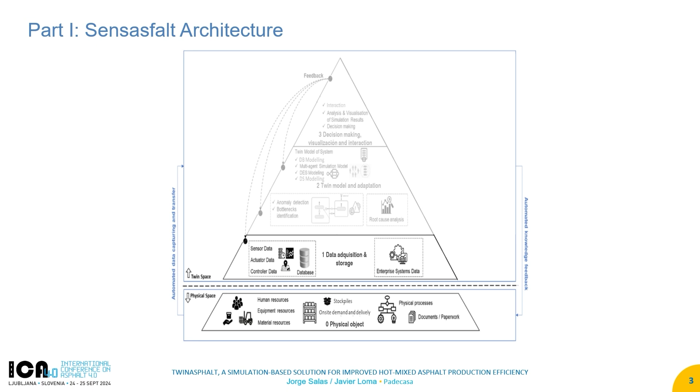This data, in our case, comes from two sources: one is the plant's PLC, and the other is from a net of sensors connected to a platform through an IO-Link network, which enables, in a very easy way, to gather the information of all the sensors, collect it, and send it to other places.

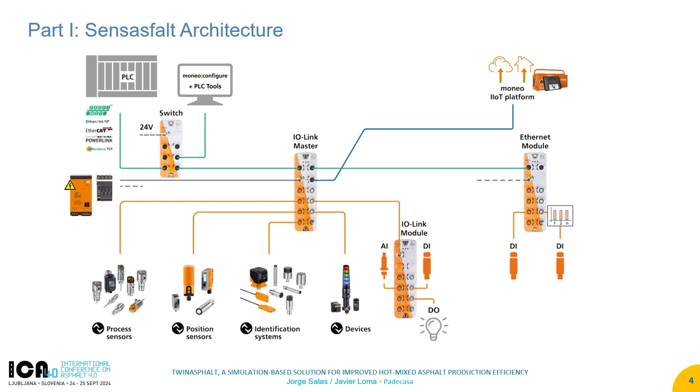This approach has an advantage, which is that you can deploy your sensoring system without affecting the functioning of the plant. So in case of retrofitting or upgrading plants, it's quite important because it reduces the impact on the production stage.

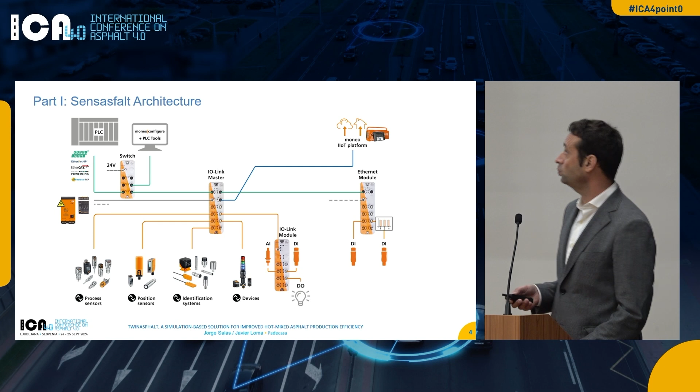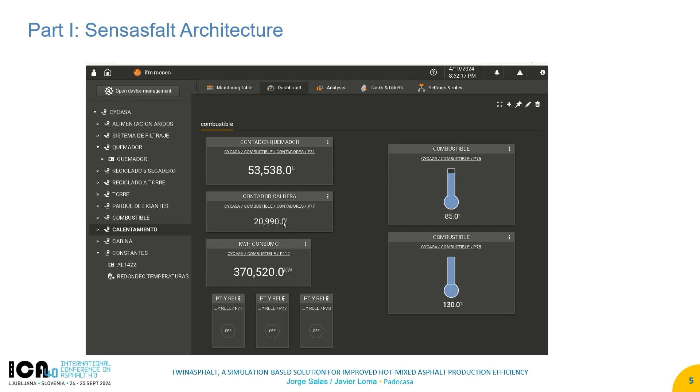This information goes to a Moneo platform. Moneo is a software for industrial monitoring, which allows visualizing the information and structuring it. For example, in our case, we structure it by parts of the plant, so the feeding system has its own sensors.

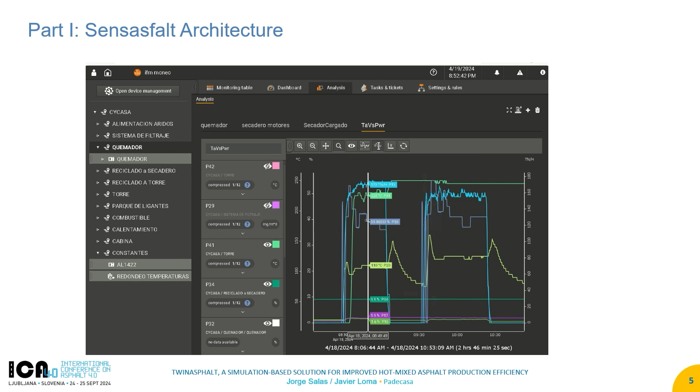The stocks can also be monitored, as well as what is happening in the dryer, the temperatures. For example, these are the temperatures of the dryer, which you can also use later on to fit models and so on—this is indeed what we are doing in our digital twin. It also provides information about the humidity of your materials and so on, in real time.

Once we have gathered all that information, we send it to an SQL database, which is a very common database language, through a data logger, KepServerEX. KepServerEX takes information from the Moneo system through an MQTT protocol, which is also quite standard, sends it to the database, and in the database we begin processing it.

We have developed our own application for associating the information from sensors to the events that happen in the plant, mainly to mixes. Each time a mix is created, the PLC gathers a lot of information, but the sensors do not, because they are not connected, so we must do that work ourselves through our platform and application. This way we also identify deviations from theoretical values.

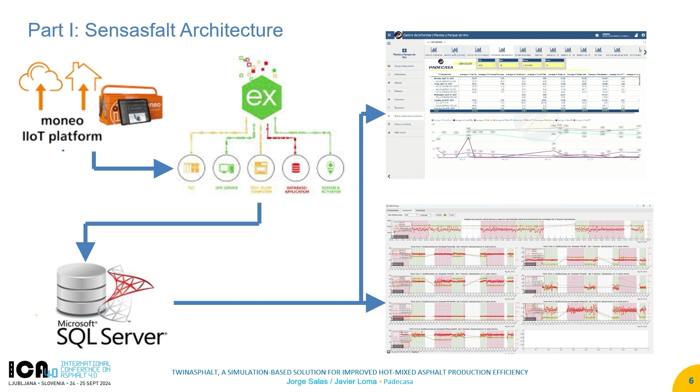Along with this identification, we have developed a Power BI-based platform which allows deploying the information to each department through a reporting system to perform quantitative analysis. With the first application, we can develop qualitative analysis to find out deviations; with the second, we can have an overall outlook of the performance of our production system.

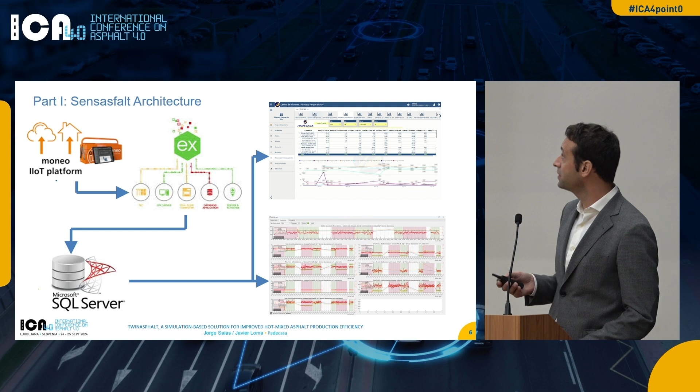This we have implemented in two plants. With it, we can also find out CO2 and CO2 equivalent emissions at mixes and delivery orders level, by type of recipe, and also by discriminating between types of material and sources of energy used to heat the components.

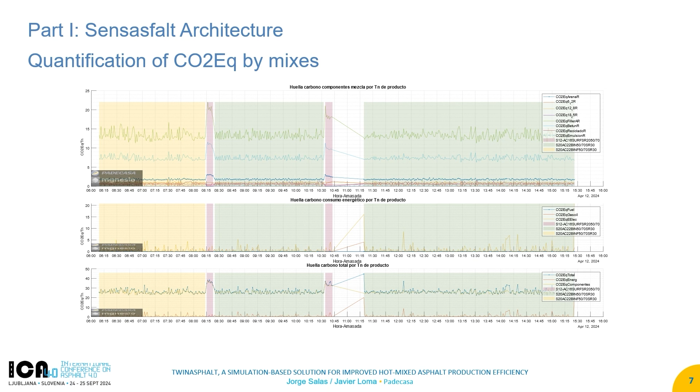So this enables us to develop our own environmental impact system. And this was all about the architecture of our monitoring system.

As to how we use it, the use case I'm going to talk about is using it for the identification of deviations from technical requirements. Specifically, we use it for identifying when a delivery order or a truck contains asphalt which could not meet the requirements of our clients in terms of the shape or the aggregates, the sizes of the aggregates within the mix. So at delivery order level, we can identify which delivery orders are out of or may be out of specifications.

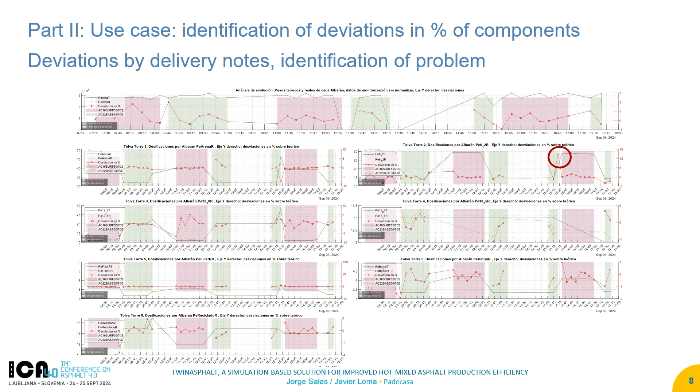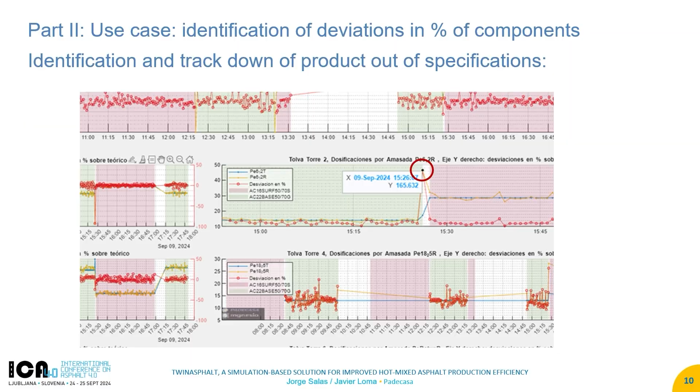We do that by plotting the real dose and the theoretical dose of each component, the sand, the other aggregates, the bitumen, and so on. And once we find one potential problem, we look at it more deeply at mix level, so we can identify exactly which mix could be problematic for us, and then inform the construction site and leave that part of the truck, or even the complete truck, without laying it, preventing having to spend much more money in the case of identifying further problems when the pavement is already done.

And this is the case I wanted to share with you. And if you have any question about it, I will be glad to try to address it during the rest of the workshop. Thank you very much.

Is there any question for Jorge? No. I think it's very interesting to see for quality control of what we are delivering, no?

That when you detect something, it's always better to say, please don't use this mix or this truck, or part of the truck, as you explained to me yesterday. And maybe it's just a few hundred euros, as you said, but if you put it on the road, it will cause a big problem maybe? Yeah, or it will have an economic cost and also a more important cost to your image. So the problem with those things is the cost with your client in terms of having to intervene in the road once it is operating and so on.

Yeah, so it's very interesting to see this continuous monitoring with the sensors in the asphalt plant is actually helping to provide a better quality. And also in these readings, in these graphs, you can see also the impact of different materials.

It's very interesting to see how the emissions change drastically depending on the mix. It's not the same for a coarse layer than a base layer. If you put cement, suddenly it goes up and down. So it's really nice to see how all these sensors are measuring what we expected.

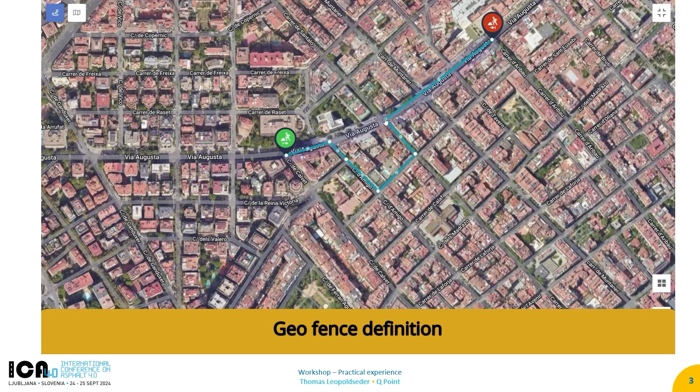It's also important that you can add graphical information like this. We enter a point of interest, which is the entry point of the construction, and this is the exit point. But I do not want to pave this road - I want to do it differently, so I remove these points and pave this section instead. This is important for people working on the construction, but also for truck drivers who will come later and deliver the asphalt.

So everything is now saved. The first process I want to support with the solution is not asphalt pavement, it's RAP management, because when we're milling the RAP material, it's also necessary to bring it to a RAP plant. We use the system to enter information that I will deliver RAP material to a recycling plant. I select a plant, the material I want to deliver, the time the trucks will arrive at the RAP plant, and the trucks which will be used. I add a comment, then send this to the RAP plant.

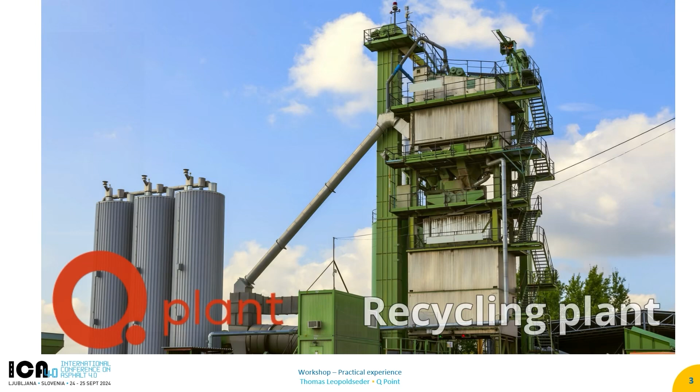You see a status here, and now we're changing to the recycling plant. We receive this information digitally. I can open it, and on the right side you see all the information entered by the client, very quickly. The RAP plant can check if they can accept this material and will approve it. The communication with the people on the construction site is done in this way. I accept it, and the site manager sees in the status that this delivery has been accepted. Okay, now we've delivered our RAP material.

Now we're doing asphalt management. We do more or less the same thing. We select an asphalt plant, select our mixing orders from a menu, so it's not possible to order the wrong material which isn't available at that plant. I select my delivery date, delivery time, and delivery rate, which means how fast I can bring this asphalt onto the road, more or less.

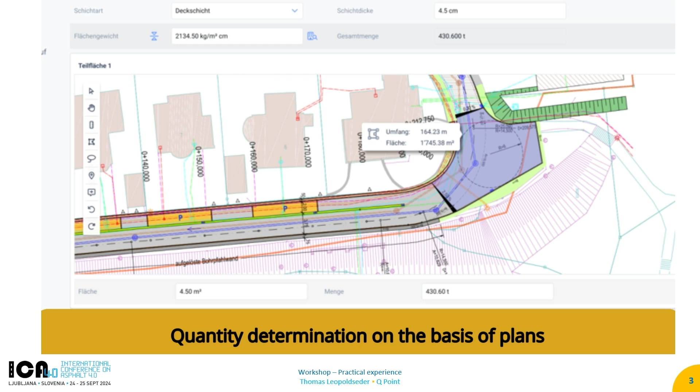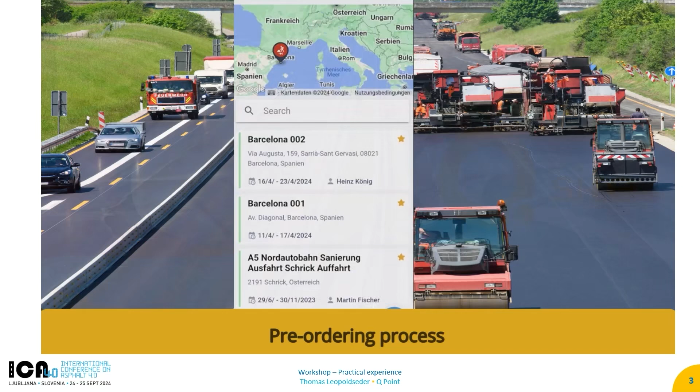I can decide which truck will be used for the transport if necessary, and I can also add a small comment - it's more or less a question to the asphalt plant: can you deliver this asphalt at that time in that quantity? So I send that to the asphalt plant. I create a second one just to show you we have two different types of requests. There's also a possibility to calculate quantities based on a map, for example on a plan. You can also predefine the route for the truck, which has to be used to come from the asphalt plant to the construction site.

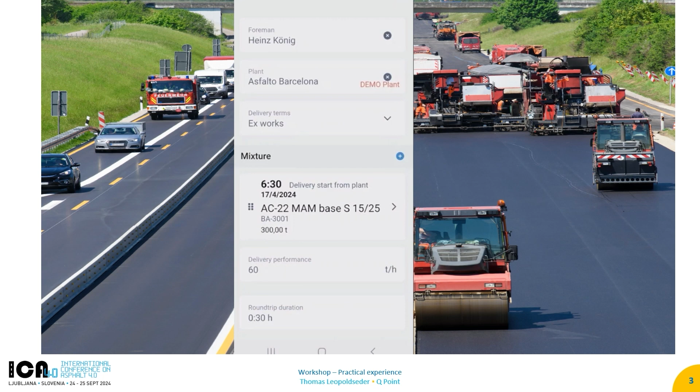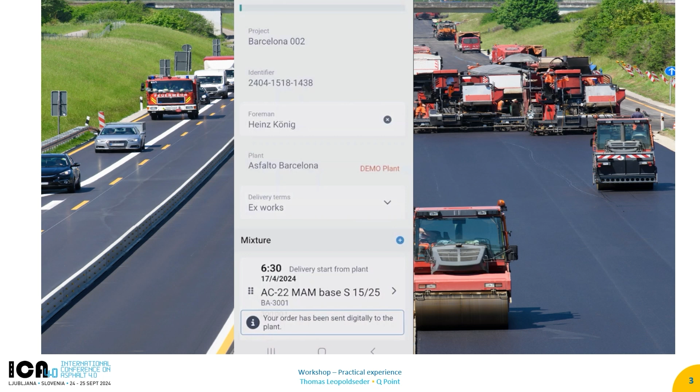Here is a screenshot of the app. So all this information entered in the web browser is also available on the app, and the foreman can send this prepared order to the asphalt plant. We can separate the processes between the construction manager preparing everything and the foreman changing something and sending it to the asphalt plant.

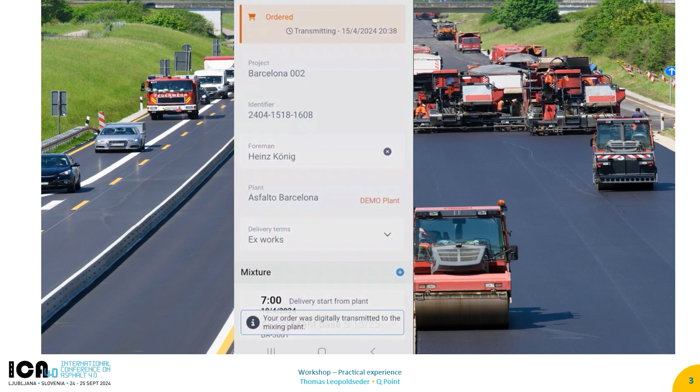What we're doing here now - we have two different states I want to explain. One is just a forecast of what will happen next week, and the other is 'I need this,' so we sign more or less a digital contract.

So we receive this on my asphalt plant. I get the same information here on the right side about delivery dates, about the construction, also the phone number, which is sometimes necessary, but it's not necessary to look somewhere else. I enter here, also from the plant side, some master data about the construction. This data can also be passed to the system via interface, and then I accept it just by pressing a button, and then everything is confirmed between the construction manager and the asphalt plant.

I can also add a comment, you have seen that. So the whole communication is organized with these digital tools.

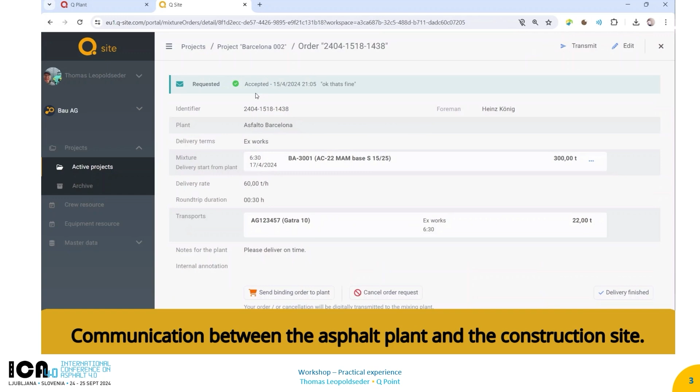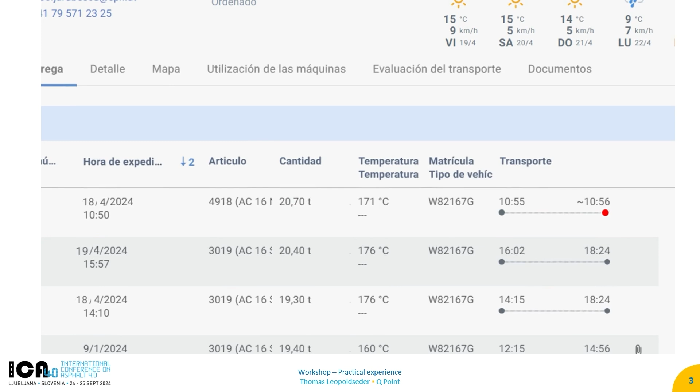On the other side, you see here it will arrive at 10:56, for example. And we are also sending that information to the asphalt plant to see when the truck will return.

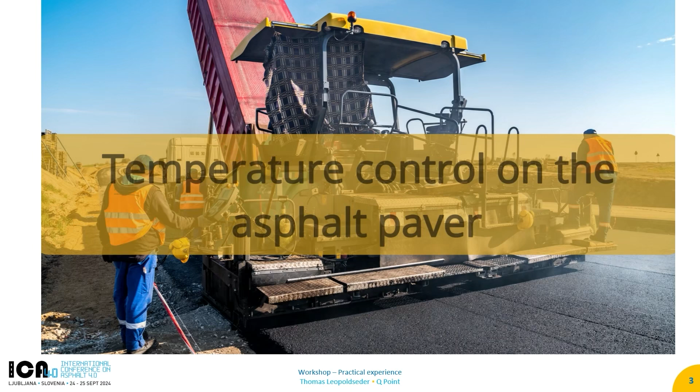During the whole workflow, we are collecting a lot of data. I've also reported something yesterday about energy consumption, about the orders, about all these things.

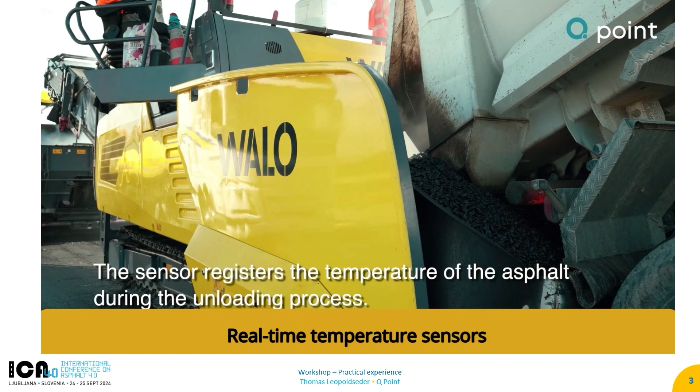So when we are now in the paving stage, we are supporting the machines by a retrofit system. We mount the system, the sensors, the GPS systems on the machines, any kind of machine, which guarantees that the accuracy is the same, that the sensor type is the same.

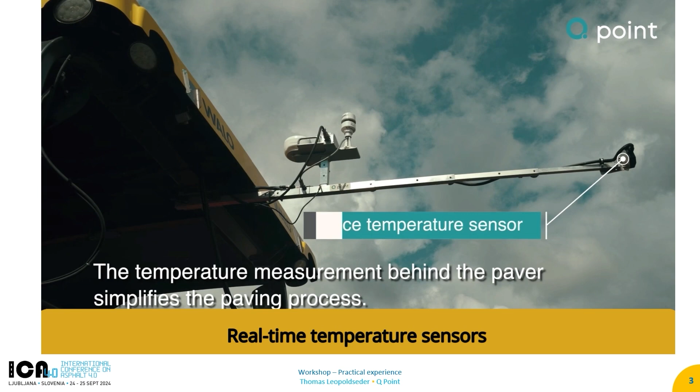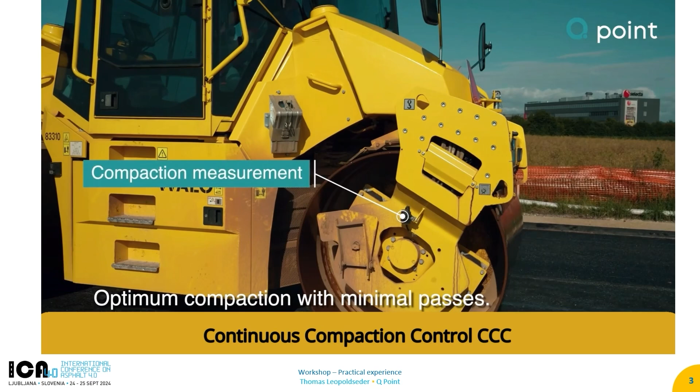We measure the surface temperature, the weather temperature and conditions, and during the compaction process we measure with sensors the temperature, also the passes, and also the stiffness if it's necessary and possible, depending on the type.

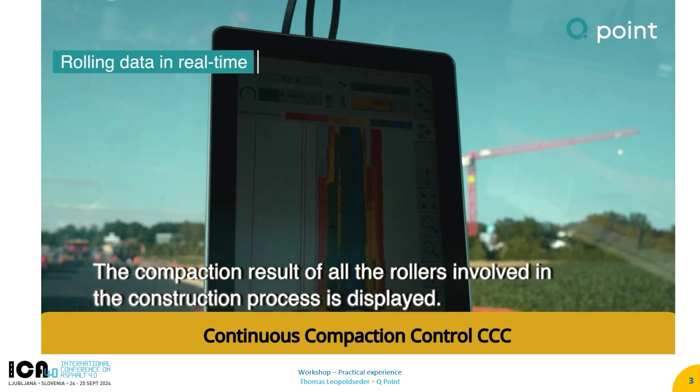We are visualizing that for the drivers, so they see what they are doing based on a target value which has to be gained.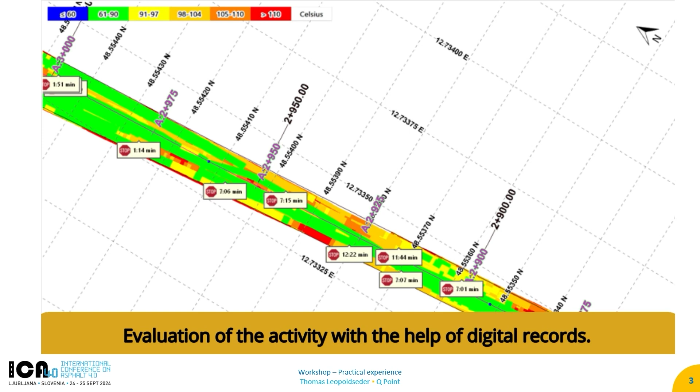The whole system is also online, so a quality manager can sit in the office and see what is happening on the construction site.

My colleague in Spain has a presentation at the moment, and I'm connected to this presentation and see exactly which demo example he is showing to our possible clients in Spain.

So the point is, you can manage the production, you can manage your asphalt plant, you can manage your constructions from any point, from any place, at any time. And I think this is more or less the largest benefit we can have.

We are collecting a lot of data to optimize the processes, and that's a real digital value chain. Thank you for your attention.

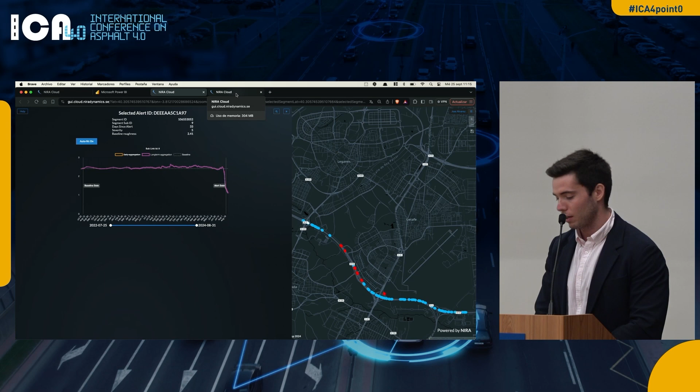Okay Miguel, this is really cool, but let me show you something cooler I think. This is the IRI of that part. As you can see there are plenty of roads, plenty of ramps, plenty of streets also, so there's a focus only on the highways that we have here, and the place that we were looking was around here.

First of all I want to show you this - the average days since last measurement update. It's completely 0, so it's actual, up to date. You don't have to go there to measure anything. It comes from yesterday, so tomorrow we will update today's data.

So let's see what is the effect of the repavement. On the x-axis you're gonna see segments like around 25 meters - that's the accuracy that they are providing right now. We can know exactly when they did the measurement - it was August last week.

I'm not there to look at what they're working on, but the cars are telling the truth. That's the good possibility of the connected car - they give you the information. Now we have 1.43. You don't have to go measure.

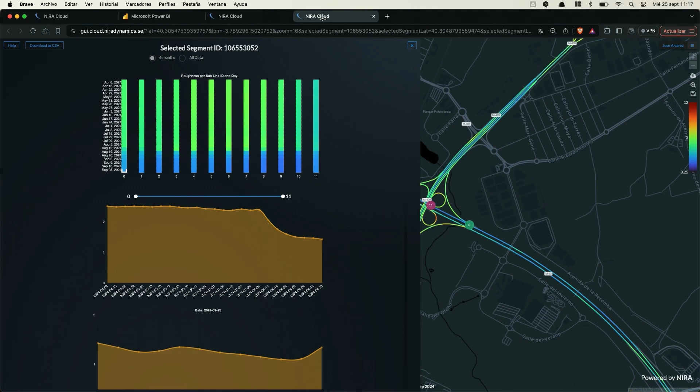Another good thing we can look at from here is something as easy as the weather. What is the weather right now at 11:15 in Madrid, in that part? It's 18 degrees. We are here in Slovenia, a little bit colder than that, and we can see the temperature of the cars that are going through the road.

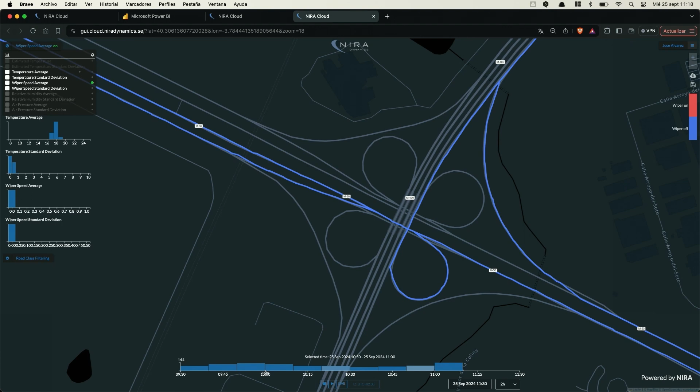Also we have the wipers, to see if it's raining or not. Right now, let's see if it's raining - it's wiper off, okay, Madrid is, I hope, sunny. When we get back to Madrid it will be sunny. We can go back to see if it was raining - the wiper was on here, a group of wipers. Maybe there was something over there.

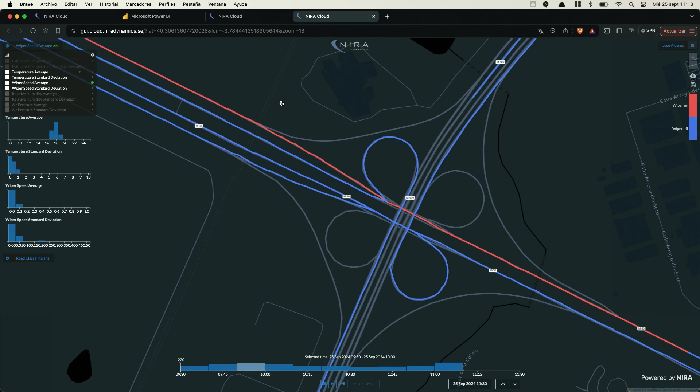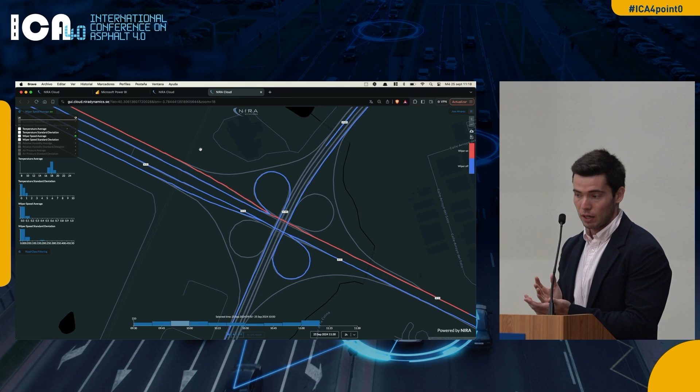That's the powerful thing that we have on the cloud, all the data. We can ask, and this is just the user interface. You can't make engineers speak about that road, that kilometer marker - you have to do some analysis. So we create some dashboards.

This is 81,000, almost 82,000 kilometers of second level network in Spain. Nobody asks us to do it, but we like to do analysis. Then we have the provinces of Madrid, Andalucía, Aragon, and we can see how the IRI changed from one year to the other.

That's the good part - we're not doing this every day. It doesn't make sense to do it every day, just once a year. Sadly we can see that it gets worse, 80% in the whole network, but we can go deeper in the analysis. We know the kilometer where it's worse, even the 25 meter segment where it's getting worse. We can see only the single carriageway or dual carriageway. We can give plenty of answers to the questions that road authorities have.

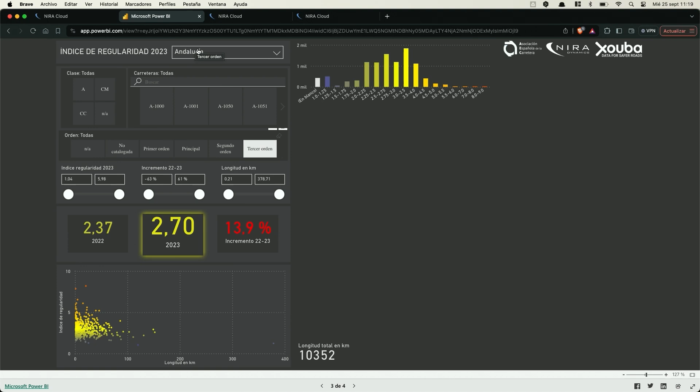We can go deeper, for example in Andalucía, which I recommend you visit for holidays. For example the IRI, the average of the whole network, is 2.7. That's not really bad depending on the type of network. In 2022 it was 2.3, so it's 14% worse.

Okay, let's see the ones who improved last year. What does it mean, improved? That you repaved.

Those are the roads that were repaved last year in Andalucía. I didn't know anything about Andalucía, I've never been there, I don't call anybody to know that. This is the power of this technology.

That's only an example of what we're doing right now. We make a lot of things, for example, for city councils: you need to repave that street because it's getting really worse, or I know that last week you repaved those streets. We have plenty of options.

Also with that, I'm going to show you another thing we have: potholes or bumps. Let's start with the bumps. Here it's really small maybe, but you can see the first time it was detected and the last time it was detected. Here it says 0 hours, so there was a car passing through that bump that's really close to me, that knows the location - it's a park and there's a bump to reduce speed. The cars are making the information for you.

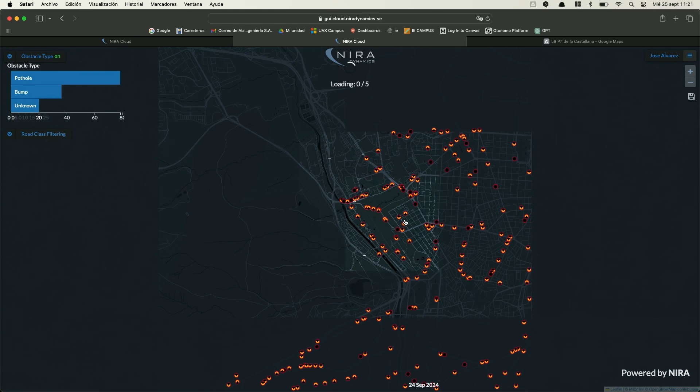That's the good thing. If we go to Madrid, it's going to get crazy - plenty of potholes, we need money to make investment. And this is the good part: I can go everywhere if there are cars connected to the system, to the cloud. There are too many potholes in the Madrid area, so that's the thing we want to show you.

There are plenty of use cases. We are doing only the top ones, but we want to go deeper in that analysis with fuel consumption, with roughness, with speeds, with any sensor that your car is giving information.

I don't have information for Slovenia, but if any of the Spanish guys want to know anything about their streets, I will show you and you can complain to your mayor. That's a good part, that's the way to act with data. We were wondering, no, my road is bad, it's really bad and it's getting worse. It's going to cost us plenty of money next year if we don't act right now.

So that's it. I have plenty of options to show you, but I'm not going to bore you going around. Thank you. Okay, thank you, Miguel.

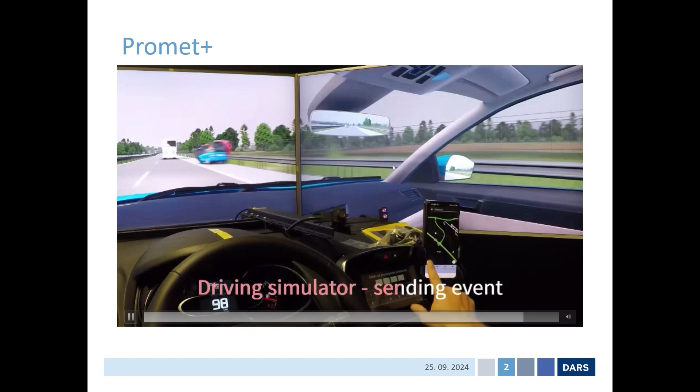What we are doing here is that we wanted to test and assess how to use it in the car, because it's not very safe to do anything besides driving.

So we had a driving simulator, and we tested how drivers react to messages—when they get a voice message, a text message, or only a picture or a sign. It's also important where the message appears on your device: is it low, is it high, or where is it? So this was developed with all these tools.

What we are doing here is that we want to connect, because we are dependent on all the systems that our motorway company and also the roads agency use for their work. Also, the tools that you presented before—these are always a good source of valuable information for the drivers.

So what we do is, all the time, we are planning and thinking what and how to push it to the drivers. And one important thing is that... well, okay, no problem.

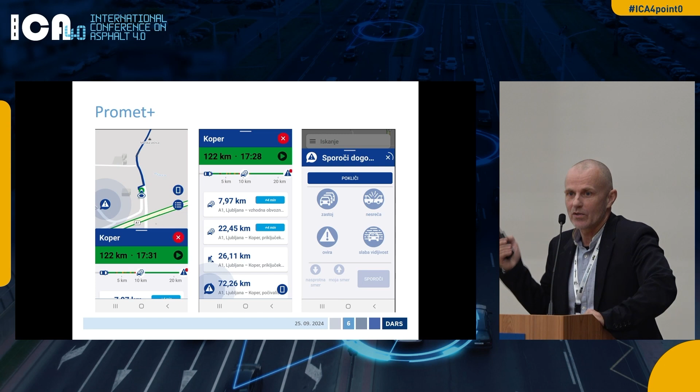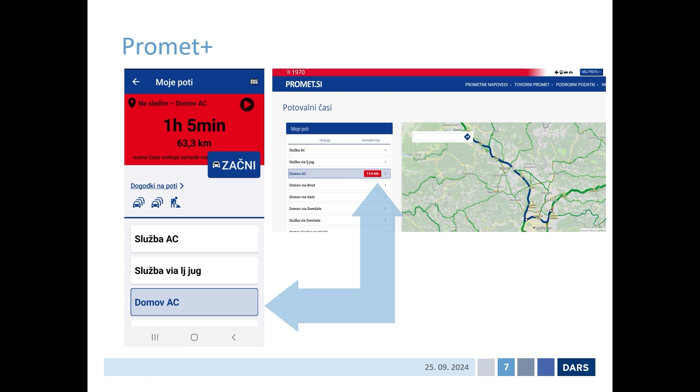These are some screenshots of how the application works. We connected it with the website promet.si—if you drive, or if you need to know anything about the road network or what's going on the roads in Slovenia, you use this website, and you can connect your app with this website and use it while you're in the car.

This is what I was talking about. The role of this app is important for drivers to use it so the roads can be safer and the drivers better informed.

We also developed it ourselves. Some people asked us, why develop an app like this when you have all the commercial providers like Google, like Here, like TomTom, or other apps that people use?

Well, it is our job to give information to drivers on Slovenian roads. We found out that they don't give all the information that we produce and that is needed, in our opinion, for drivers to be really well informed. And since they don't do it, we do it with our systems.

This application is, in fact, only one stretch of the background system, which is a system for traffic information services, and we provide a lot of other things. We also have tools for our people in traffic management centers and traffic information centers to use that application, and from that application we source also the mobile app.

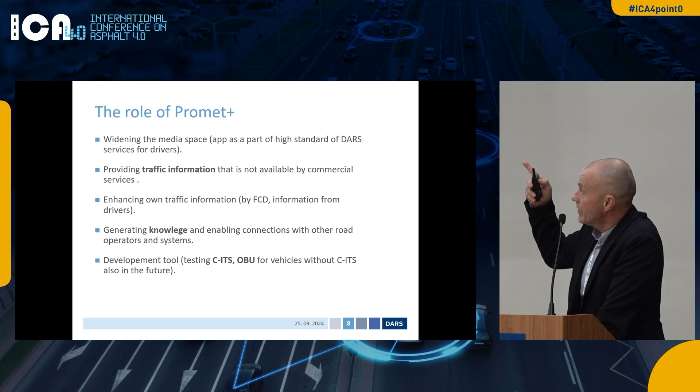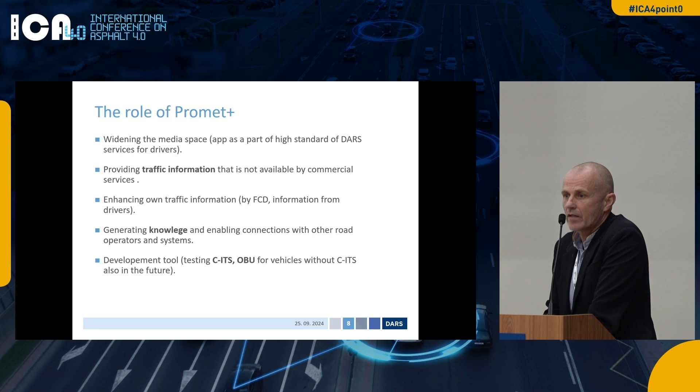At the end, you can see the C-ITS. We used this app as a C-ITS tool for testing cooperative intelligent transport systems. As you know, there is a European project, C-Roads, and we are very active in that project, and we tested these systems with that app.

Relating to maintenance of the motorways and reconstruction of the motorways and all roadworks necessary on the roads, we connected this app to the devices on the maintenance vehicles. We get the information directly to our system and through our system to our app, using these C-ITS systems that we developed.

That information, it's not just any data that comes in - that's quite a big difference for us between data and information. We have a lot of data, and if you give too much data to the driver, it's the opposite of safety. So we have to translate it into good information. Our C-ITS systems are very good at that, but you need experts behind them, people that know what they are doing. My stress is always to have good experts that can do it manually, but they can also develop - they are the best developers for our tools.

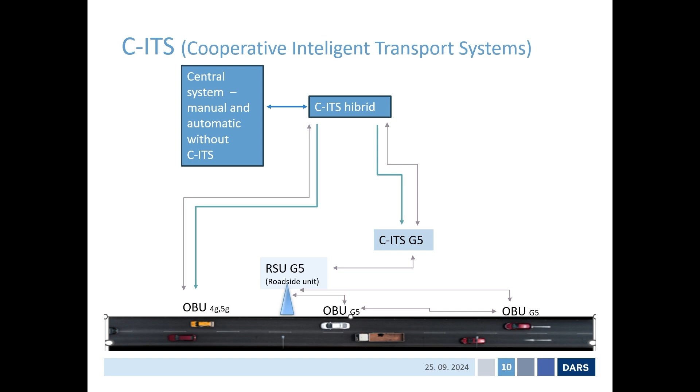This is just a scheme about how our C-ITS hybrid system works and where the information comes from. On this app, we can also get information from roadside units, from C-ITS systems, from microwave communication. Via the hybrid system, in less than a few seconds, we get good information to our app, and you will get it on the road if you are on the motorway.

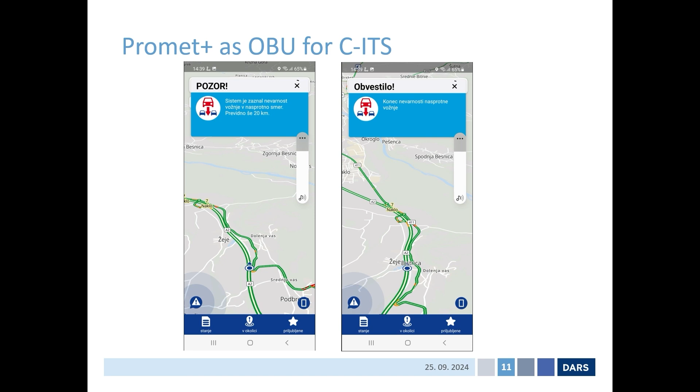This is one case: on Slovenian motorways we have quite a lot of inductive loops, and these loops are managed so that they can also alarm for wrong-way driving. If somebody drives the wrong way on those loops on motorways, they trigger the alarm, and the alarm goes to our hybrid system and directly to the app.

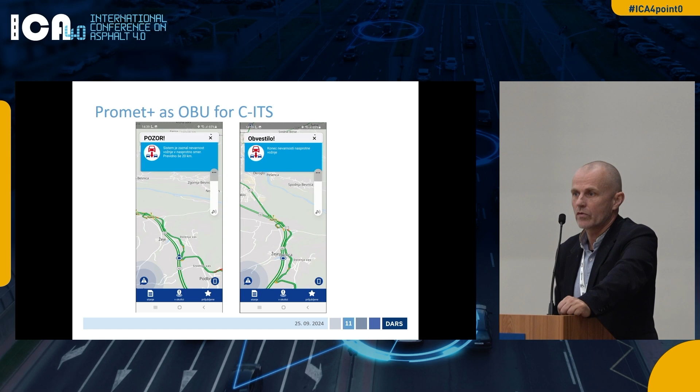Our app knows where you are, and if you are driving on the motorway in danger of this possible wrong-way driving, you get an alarm on the app, and you get a voice alarm so you don't have to look at your app - you just have to be careful how you drive along this road.

This is just a proof of concept that we just made, and this is development for the future. We made a proof of concept already to put this app into Android Auto and also Apple CarPlay, but there are some issues.

More administrative than technical issues with Apple, but this is how we want to go on, because we are living in this media world where there are more and more tools that people use, and they are more diverse, and we have to deal with everyone. The old tools haven't died - radio is still there, phone is still there, they are still calling. People still want information by calling a center or somebody.

But there are new tools - navigation systems, C-ITS systems in the cars, things like Android Auto. So we have to cover, we need to cover all the things.

To be good at these things, it's not just that we know how digital technologies work in this field, but we also need to have good, very close cooperation with all the people working with roads, on the roads, producing all the applications and all the data that we can use to go on and use it, so you will drive safely.